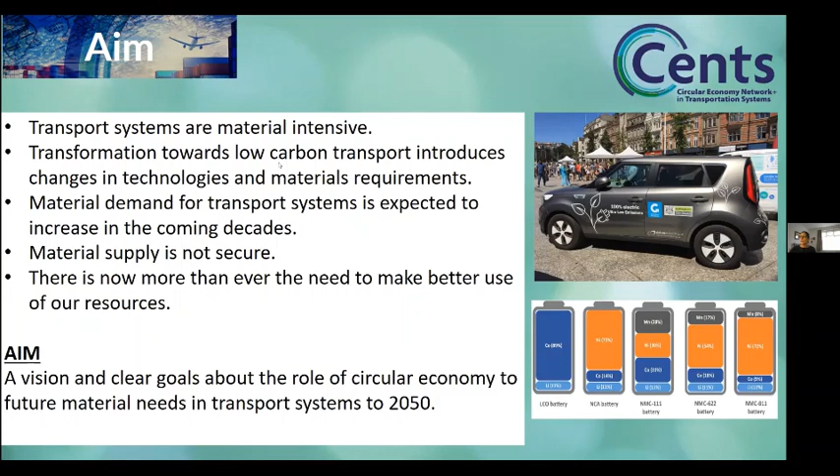So what we did is decide we're going to develop and organize some sort of road mapping exercise. Initially, the plan was that this would be a natural series of in-person events. Obviously, the whole timing fell during the pandemic, so we ended up having to do it virtually. That didn't put us off - we were very ambitious.

So material requirements for different transport systems in 2050, what the role requirements for transport in 2050 are, social trends and how these may influence materials in transport, and finally material supplies and how we can incorporate circular economy principles in them.

Following that online survey, we took the 4 topics and organized a program of 3 virtual workshops. These all took place in December, quite close one to each other. We had a series of participants.

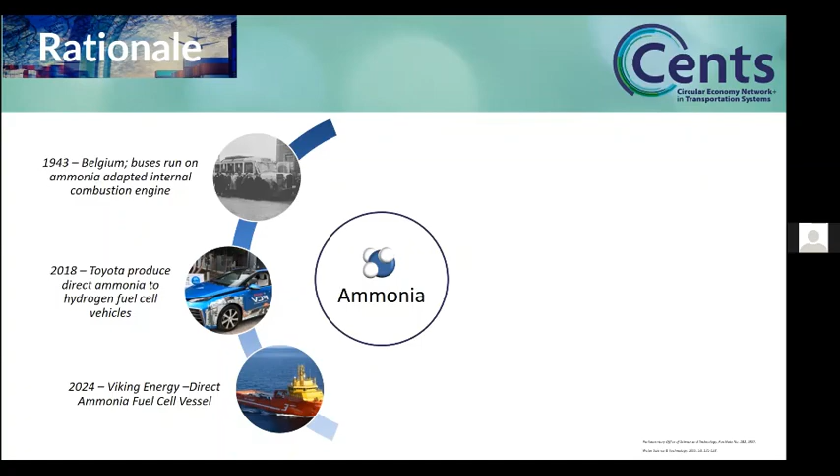So it can either be applied within an internal combustion engine, such as during World War II in Belgium, where due to fuel shortages, they converted the internal combustion engine of buses to utilize ammonia, or it can be used within a fuel cell for direct electrical generation. For example, Toyota have produced an ammonia fuel cell electric vehicle, which utilizes ammonia to store energy as a fuel, converting it to hydrogen in situ. The other option is to use the ammonia directly in a...

Hi everybody, my name is Pierre Josso, and today I'll be presenting our feasibility study, which was done at BGS with other members of my team here. The objective was to look at the past and the impact of extreme shocks on raw material supply chain for the transport manufacturing sector.

In terms of context, the global aim to decarbonize the UK economy, to tackle climate change, will require fundamental changes to our transport infrastructures and energy production, which will require vast quantities of raw material. The current sanitary crisis we are all experiencing is unprecedented in scale, and it has put the world to a halt, shutting down international transport, disrupting trade with Far East countries, entering lockdown cycles at different rates all over the world. This situation has really highlighted the complexity of our supply routes, and questioned the security of our supply in critical raw material, which are essential to meet our decarbonizing objectives.

So for this feasibility study, we were trying to look back at recent history and analyze how the past major pandemics and economic crises have affected the supply of raw material. So to do this, we've used BGS mineral intelligence and historic records of mineral production per country since 1913, and done some statistical analysis and compiled that into different proxies, which I'll show you briefly.

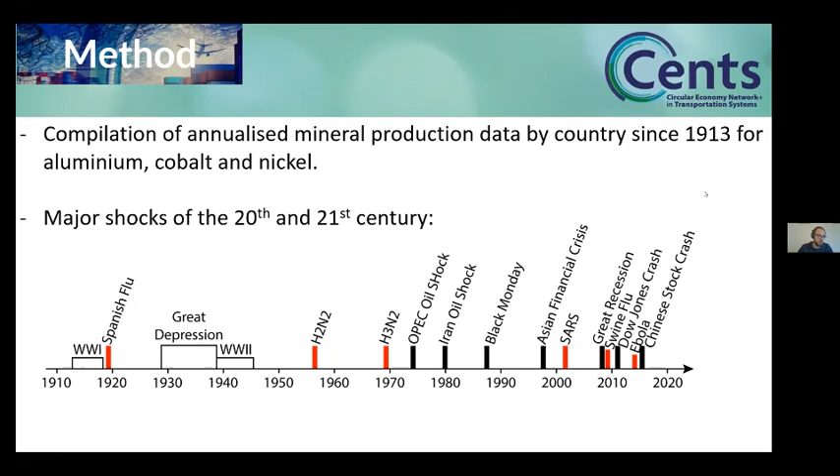So the major finding is that none of the major past pandemics, such as the influenza outbreaks of 1957 or 1968, SARS in 2003, and Ebola in 2014, had any measurable impact on supply, whether we consider the global volume produced or the concentration and diversification of the market, since we also looked at the number of producing countries and their relative shares. So there has been no real measurable impact of major past pandemics.

One noticeable exception to that, however, is the Spanish flu of 1918-1920, which caused millions of deaths throughout the world, which is quite sad, but its economic impact is unfortunately difficult to deconvolute from that of the end of World War I and the transition between war and peacetime economies and the associated recession.

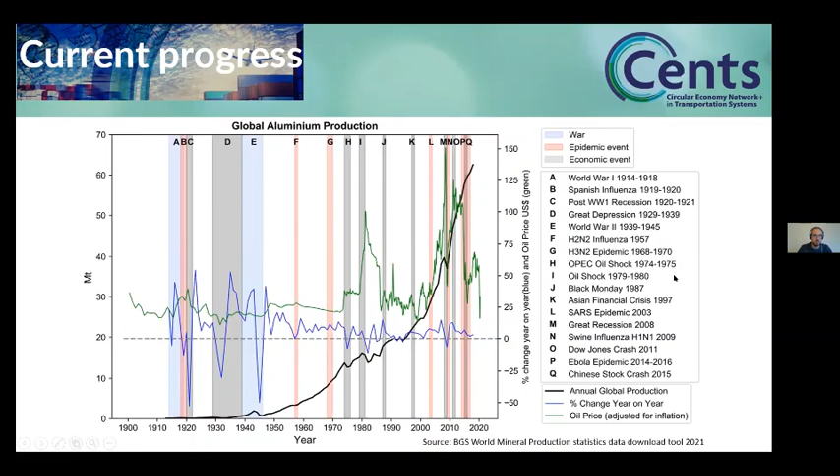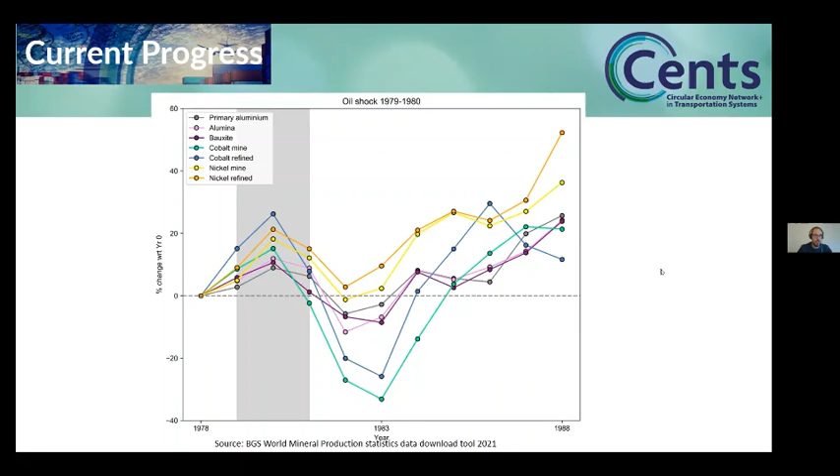We actually saw all this happen from January through April last year. This is followed by a demand shock as a result of depressed economic demand and growth. And in phase 3, we usually see the alignment of industries to the new demand levels, which favors the most profitable projects and causes others to fail.

This has knock-on effects on trade routes, while most governments try to stimulate the economy to minimize damages. Phase 4 is the one we're in at the moment, corresponding to demand rebound, leading to minor shortages of commodities, rising prices, and new investments.

So back to kind of the new normal, I would say. At the moment, we are experiencing, well, we are in the middle of phase 2, and a bit of phase 3. The lockdown measures have drastically impacted demand, and industry and governments have started to react to it. The big question for our scenarios really is not if the market will recover, but when, as time is the big unknown in this equation.

On one hand, there is hope for a quick recovery as vaccines are starting to roll out, and China as well, the big player in the mineral commodity markets, has been relatively untouched since spring last year. Notably, it's important to point out that most commodities have already recovered to pre-pandemic prices at the moment. So the problem is that the ongoing restrictive measures in Europe are actually leading to a major economic recession, which may last for years.

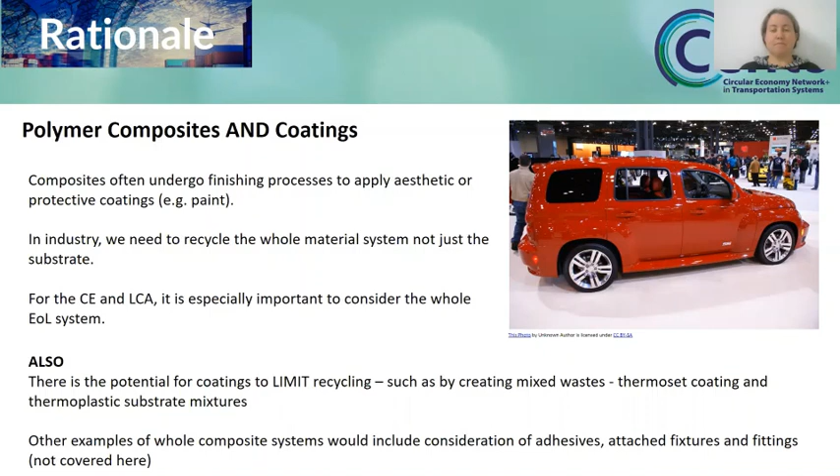So a lot of large suppliers of raw materials for coatings have realised that sustainability is an issue, and various developments have been made over the last few years, couple of decades, in terms of trying to make coatings more sustainable. For example, things like UV curable coatings that don't require volatile solvents, replacing volatile solvents with water-based formulations, trying to replace traditional synthetic resins with biologically derived resins for binders, this kind of thing.

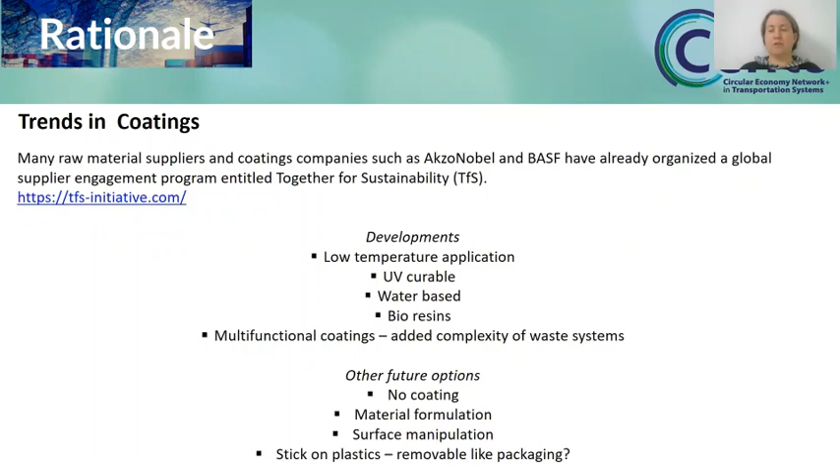In the future, slightly more futuristic ideas may include things like trying to make your components so that they don't need a coating, trying to change the material formulations even more, or possibly even manipulating the surface so that, for example, surface roughness gives you an aesthetic effect rather than having to use a coating. Alternatively, coatings could become stick-on so that there's no energy-intensive process involved with recycling them.

Now, as I mentioned, currently the trend in components is away from thermosets and towards thermoplastics. Thermosets do have advantages, however. They can be more robust, more scratch resistant. And so over the last few years, a lot of people have become interested in this technology called vitrimers, which can combine virtues of both. I will discuss that a little bit more in a moment. But this isn't just an academic interest, it is becoming increasingly commercialized in the last couple of years.

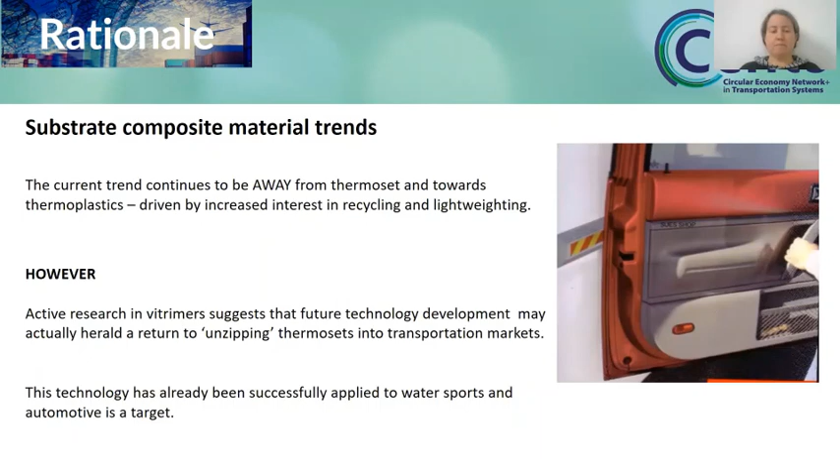So what's a vitrimer? I think it can be thought of as a cross-linked polymer network, which has bonds that can exchange, can break and reform when the temperature becomes high enough. So at the working temperature of the component, the material behaves like a thermoset and is robust and strong. But when it's heated above a certain temperature, then it gains some thermoplasticity. It can be remolded and recycled.

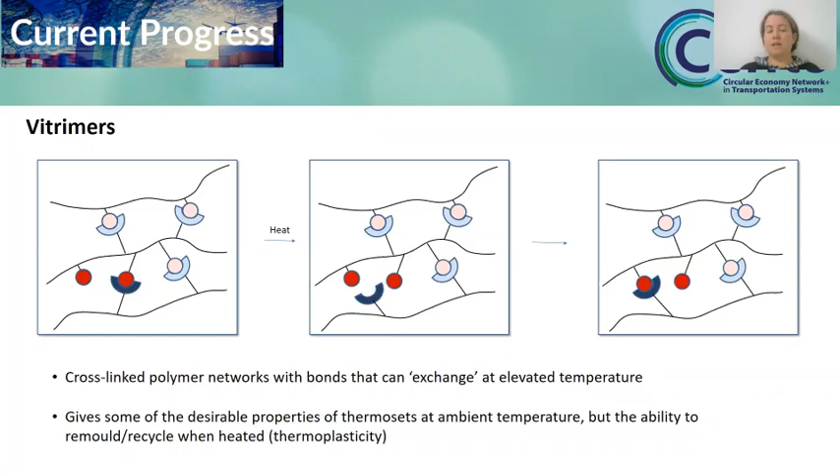However, once you've invented a sustainable or recyclable component, it's not enough to invent such a material and assume it will automatically be recycled. You need the infrastructure in place to ensure that it is recycled, and in order to efficiently use raw materials, there need to be processes in place to look at extending component life where possible, reusing components when possible.

But then actually recycling the materials afterwards, which even in the case of a vitrimer material may mean separating the coating from the component. Or if the vitrimer is sufficiently thermoplastic, it may be possible to recycle them together, but then you end up with a mixed waste stream, and there has to be some focus on a second life for those materials.

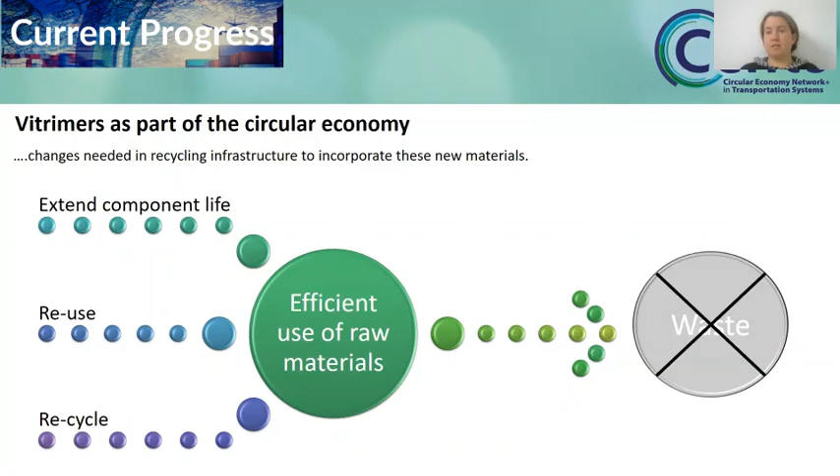So as part of this work, we've also spoken to various business partners across transport sectors and identified some common challenges in using sustainable coatings, such as finding good second uses for these kind of materials - low value material, because obviously if you try and reclaim a material from a coating, you only get a small amount, so it can become uneconomic to do the recycling.

But there are also further specific challenges identified by some industries, such as whether or not customers themselves are actually interested in the sustainability of their coatings. So that's been interesting to find out, the specific challenges there.

And just to quickly finish, just to summarize some of the outputs that we've created across this project - we have a couple of papers that are currently in preparation and will be submitted soon. We've submitted a few bids for further funding to develop this work, and participated in some research development programs.

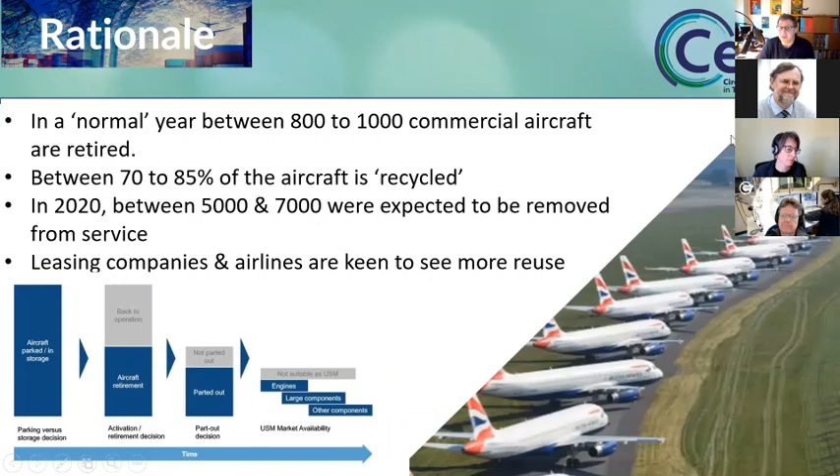For example, Thomas Cook only owned 3 aircraft, which we've been decommissioning, which I'll show you shortly. These companies are keen to get more value out of their assets. If they could recover more of the material, it's obviously a business case for them. Plus, it ticks the box with sustainability.

Now, you may be surprised, but the UK is number 3 in the world in aircraft decommissioning. We decommission about 120 a year at 2 or 3 locations in Wales and in Gloucestershire. And these really 2 main operators dominate the field.

The best in class for reuse is something called Tarmac Aerosave, which is a spin out from Airbus, came up through an EU project called Pamela, where they claim they can get up to about 85% recycling.

But we will see a trend, of course, towards more advanced aircraft with more composites involved coming into retirement in the next 5 to 10 years.

How do you decommission? There's a few strategies. If we look at the impact, the easiest way is just to shred it, which is the most energy inefficient, the most environmentally inefficient, because what you're doing is mixing all your materials up, and you then have to somehow separate them and reuse them.

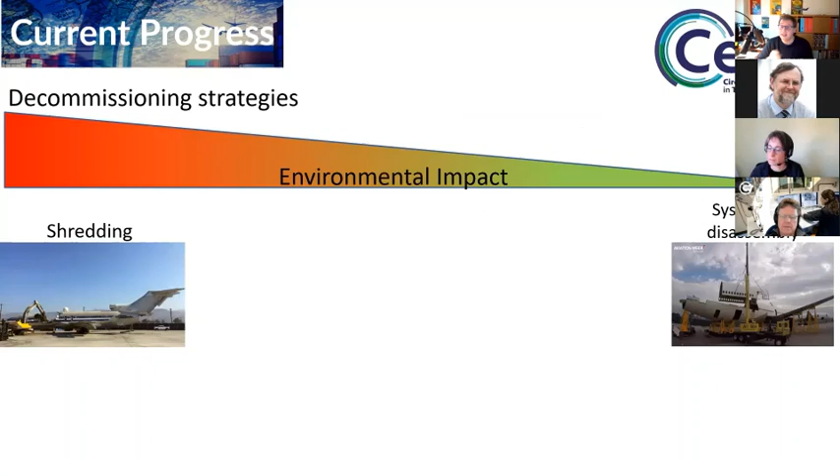The best is systematic disassembly, where you break it down in terms of materials and use that as a basis. But of course, the economic cost goes up.

And during the breakout sessions, I was discussing with one of the colleagues that trade-off between what is the most efficient way of doing it in terms of environmental recycling and what is the most economic.

And in between, we have different strategies such as smart shredding, where you choose different areas to remove, gross cutting, detailed cutting, which is self-explanatory, and smart disassembly. A lot of these practices are not widely used in industry, partly due to productivity gains and demand for the materials, but this is changing.

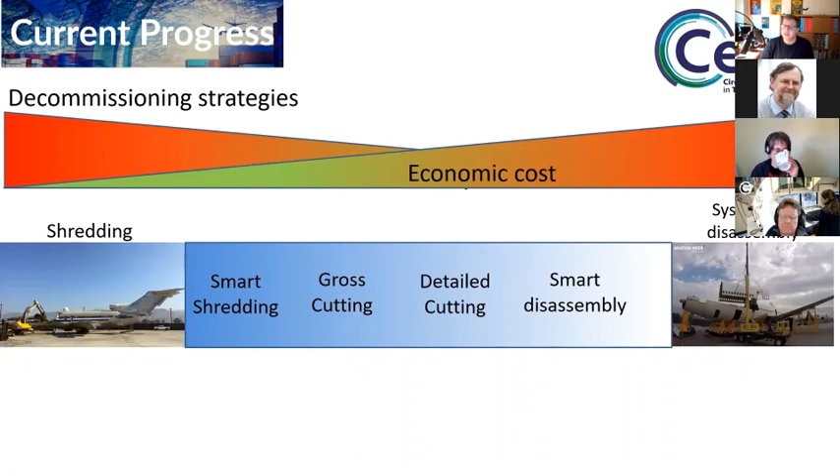Typically, decommissioning takes around 30 to 40 days per aircraft. The pictures on the right-hand side are where the team went down to Manchester Airport. This would never ever happen in Manchester Airport under normal circumstances.

No passengers want to see aircraft being cut up next to the planes they're sitting on. So only because the airport has shut down, practically because of COVID, are we allowed to decommission aircraft there.

And 1,000 parts are taken straight away. The remaining, the fuselage, the seats, the wings, the interior panels, which are composite, and floorboards, that's the challenge. How do you get that back into the supply chain? Even the computer screens, the TV screens on the back of the chairs, all that is wasted.

There are some creative usages which are coming out, but the challenge is it's always low volume. I mean, you can make fancy desks if you want with a part of an aircraft fuselage in front of you. I'm sure the demand for those is not going to be equivalent to going to IKEA and buying one of these in kit form. So there is that challenge about how much material, how many parts can be reused for these purposes.

So we've been talking to organizations which are looking at concepts such as putting offices into shopping malls, as a way to deal with the fact that people are probably getting sick and tired of sitting at kitchen tables doing their work. Can we repurpose some of this material to create easy to clean and sanitize office furniture?

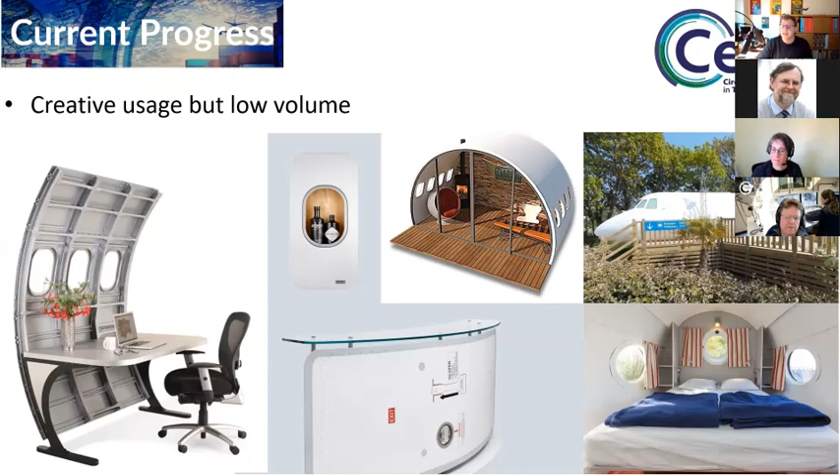I'm finishing ahead of time, by the looks of it. We started the project relatively late compared to the rest, and we'll be finishing in March.

We are now looking into more detail at some of the waste streams, so we have a team looking at analysis of that. And also the supply chain, where are the gaps which exist to take some of these materials and parts which could be reused, repurposed, but where are those gaps in particular? And that's us going out, reaching to lots of companies.

We're also looking at the trends in material usage. We know that the 777, which came out in 1997, has around 12% composites, but the newer generation have around 45% composites.

And also looking at the current inefficiencies in the disassembly process. The picture on the right-hand side is not just for the sake of it. I'm buying an Airbus A320 to decommission. So it's a real example, and we're just going for the motion. This project doesn't give enough money to do that, but I found additional funds to help us. So we're actually going through the whole process of decommissioning the aircraft over the next 2 to 3 months, understanding firsthand what's going on and bringing supply chain companies into it to say, look, this is the potential. And I'm finishing with 8 seconds left. Thank you.

Hello everyone, and thank you for the opportunity of developing this research. I'm Artem Alsbach from the Royal College of Art, and I will present in the name of my team, Eco-fitting: Whole Life Design, Upgrading Cars to Zero Emission.

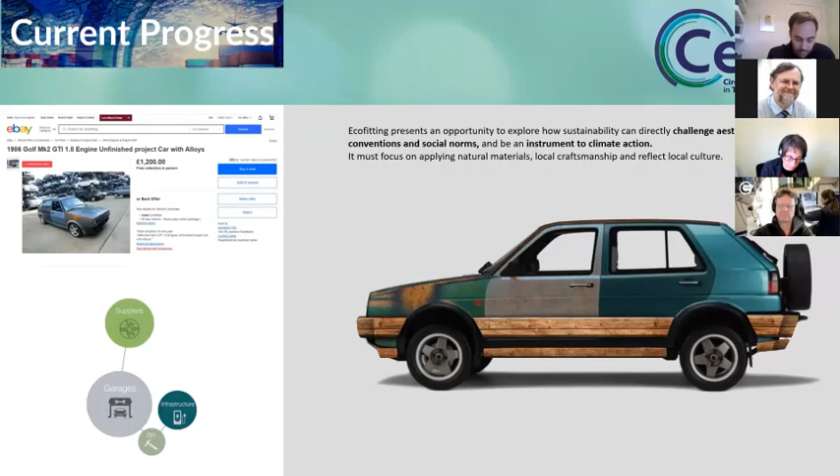These are a few of the possibilities that we saw from the eco-fitting landscape, which I want to activate in the next steps of the project.

So the planning research activities are developing an eco-fitting demonstrator to promote the concept, develop eco-fitting circular economy strategies, engagement to promote circularity, and a quadruple bottom line of sustainability. The design toolkit will be developed to promote the knowledge that we're looking at.

The opportunities are around non-compliant vehicles can be redefined, promoting zero-emission mobilities, develop social responsible material culture, promote long-term ownership, changing the way cars are designed in the future. And the circularity at the product level needs a support platform and evolve culture.

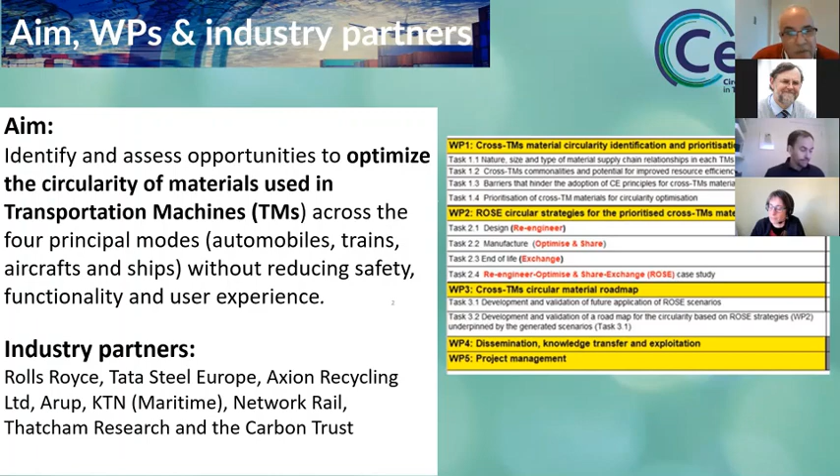The project is supported by 8 industrial partners who have been involved for the moment in 3 project meetings since we started. And then this is the approach, what we are calling the hierarchy of our feasibility studies, threefold.

Then we looked at widely used materials across the 4 sectors, or the 4 transportation machines. And then we prioritize some of these materials that we're going to look at.

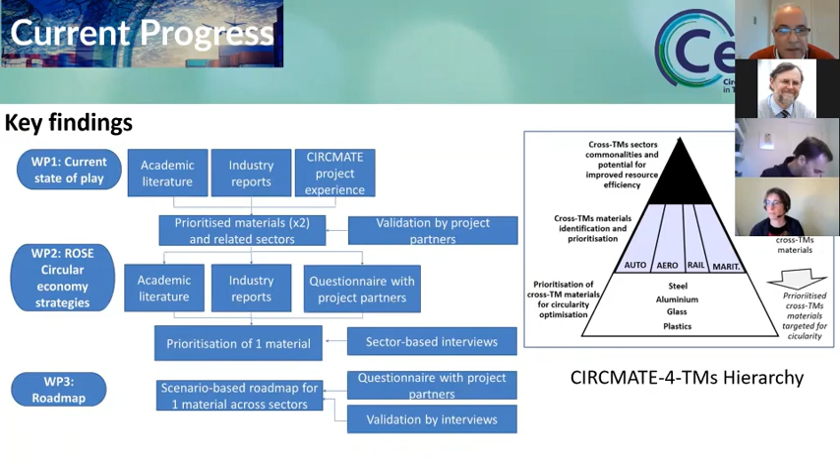So WP1 has already culminated in a milestone 1 report, and then we are now looking at implementing the ROSE framework, which is going to be followed up by the roadmap.

So just a summary of the assessment criteria in terms of potential circularity of these materials. We looked at 5 criteria: material criticality, material demand, material use, current waste recovery, and the environmental impact.

We looked at 5 different materials used: steel, aluminum, composite, plastics, and glass. But here are the 4 key materials that we looked at in more detail.

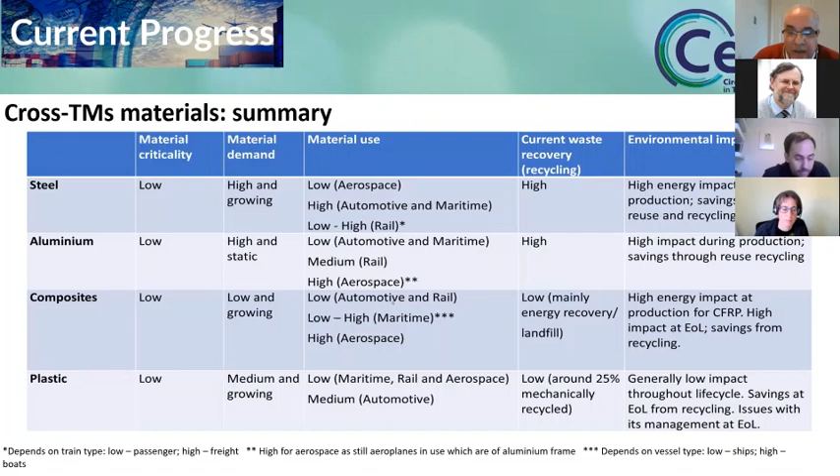And then the prioritization based on the selection criteria has selected, culminated in 2 materials, steel and plastics, across the life cycle stages of the materials: design, manufacturing, and end of life.

So we looked at opportunities across all the life cycle stages of the 4 materials. During the design, we looked mainly about material efficiency and optimization. And then during manufacturing, we looked at the recycled content mainly, and end of life, reuse, remanufacturing, and recycling. Based on the prioritization criteria that we allocated for all this, we identified steel and plastic as being high in terms of circular economy potential.

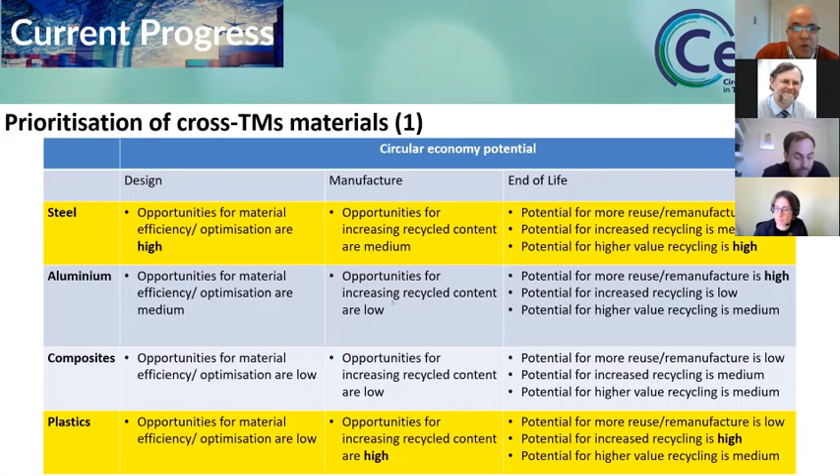So from that, we focus on these 2 materials, steel and plastics. You can see the focus for steel will be on design and end of life, and it's related to the automotive, rail, and maritime sector to some extent. And plastic will be mainly used in automotive and aerospace.

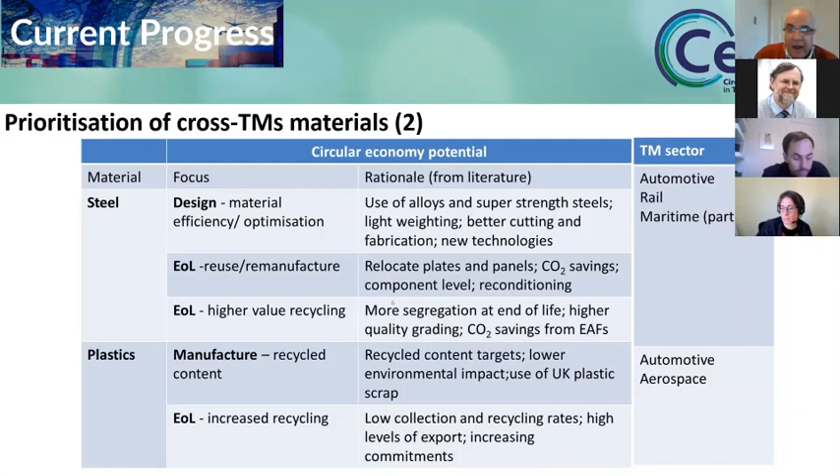And from that, like I said, the whole case study will be focused on the key framework of this feasibility study, which is the ROSE: steel, plastics.

So we start by doing the design. It's the first stage of the ROSE framework, the re-engineering process through eco-design, which is a very common denominator to a lot of case feasibility studies that we discussed this morning, looking at design for disassembly, designing out waste.

Then we're looking at manufacturing with use as well, is the optimization components of the ROSE, and looking at how to make resource efficient production, durability of these materials, 3D printing mainly for plastics, and manufacturing out waste, and so forth. And then finally, at the end of life, how can we share materials between different transportation machines, and how can we exchange raw materials, secondary raw materials between these in a closed loop between the different transportation machines, and maybe in the longer run in an open loop between different other sectors.

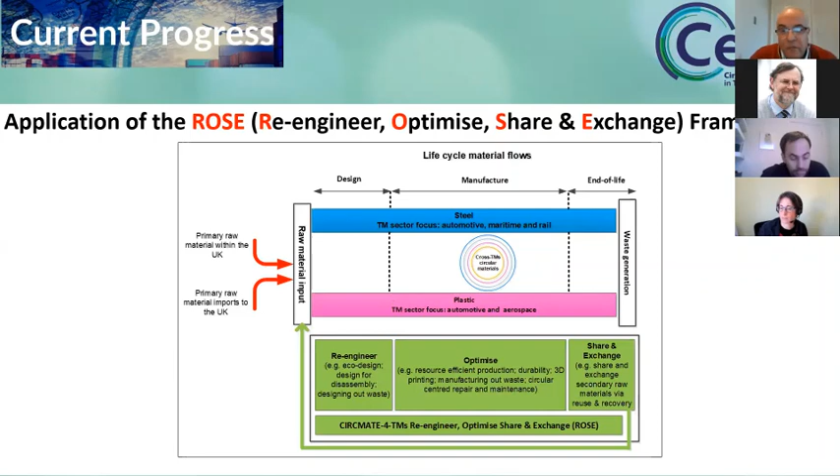And then now I'm going to pass you through to my colleague, Andrew, who will talk about scenario-based roadmap. Andrew. Thank you very much, Mo.

So essentially what we've been talking about in all of these presentations this morning is this idea of the circular economy. And I suppose we've been using it as this singular vision, but actually, what does the circular economy mean in practice? Well, there are multiple different pathways that we could take to get there.

So this is some ongoing work at the moment. We've been developing these scenarios of what the circular economy could look like in practice in transport, machine manufacturing. We've got these two critical factors which have been identified throughout the work from earlier work packages. One is around supply chain integration, so how well are OEMs integrated within the design process with tier 1, tier 2, tier 3 suppliers, and originally kind of raw material suppliers. So this idea of how do we embed the ROSE framework across the supply chain.

So that could go from low to high. And likewise, our supply chain integration globally - do we have a globalized supply chain or a local one? So we already see some issues, kind of resource nationalism.

We've got our vision statement about integrating life cycle design to optimize material usage for circularity. So we've been identifying with our questionnaire and consultation with our research partners kind of our cross-cutting actions, and then underpinning is our kind of mode-specific ROSE framework as well. So these are kind of the key outputs which will be coming out of.

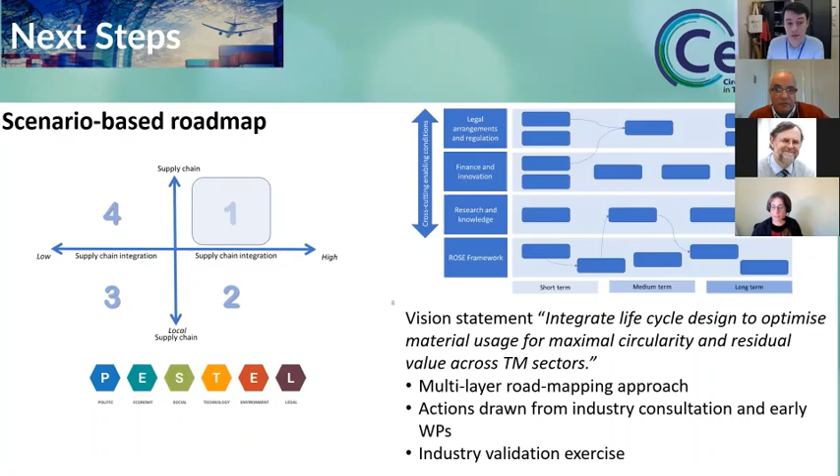That's great. Thank you very much indeed.

I've got a statement which is about what the rationale for the network is, and it comes out like this. I'm going to read it verbatim because I think it's a good statement. Whilst easy mobility has become a way of life for many, the machines that enable this are both highly resource consuming and environmentally damaging in production, use, and at the end of their working lives. Attention has been paid to increasing the energy efficiencies of these systems, and we all know about the legislation for tailpipe emissions and things, but the same effort has not been put into optimizing the resources and the resource efficiency.

Numerous potential benefits could be realized if the circular economy principles were integrated, and the sense will be forward-looking in terms of developing future designs, future business models, and future manufacturing and process approaches, so that emergent transport systems are inherently circular. So this innovation cafe session is all about how we might stimulate the ideas.

I mean, some of the conversations I've just been in, just in the last session, were actually getting to that point about looking at things like a circularity index. How do we create a circularity index that people can use before we have a design? What do we use to have a circularity index that takes into consideration maybe the three pillars of sustainability, or even the four that Artur was talking about in his project?